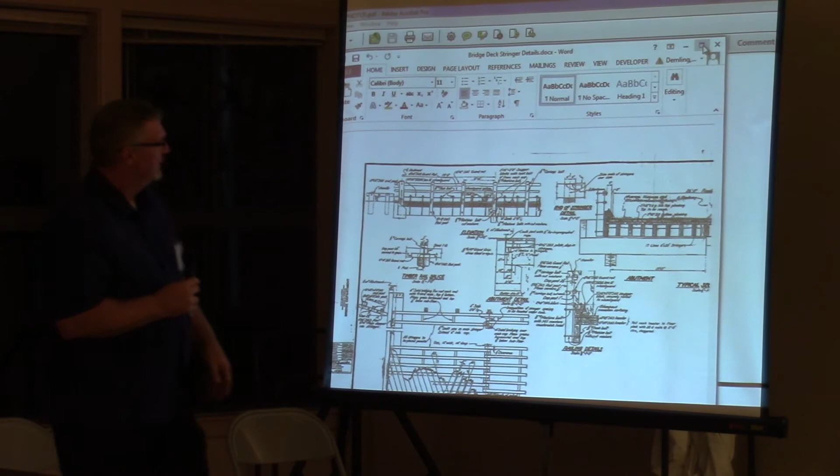What is it showing? Yeah, that's why I have the attachment, because some of these pictures, there's not a lot of reference. Okay, so this is a cross section of the bridge. This is the bridge rails. That's the roadway. We're looking up underneath like this.

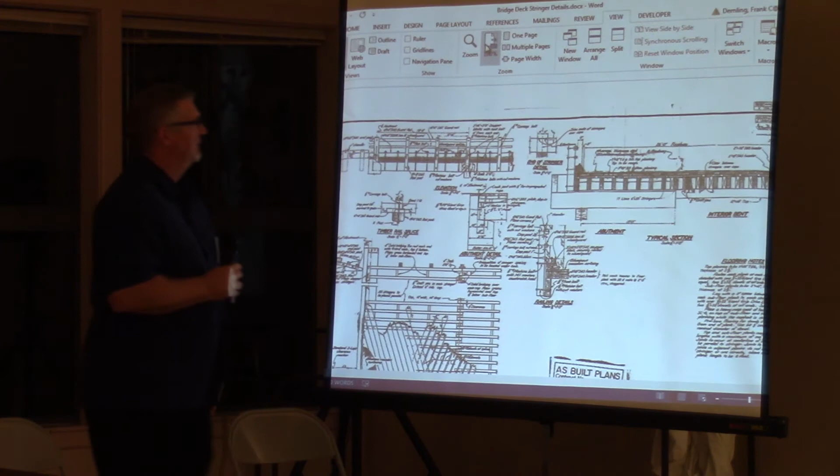You can close that out. Sorry, Frank. Okay, same. Okay, sorry. I thought I was going to have access to myself.

So basically what we're showing here is that there's the initiation of decay. So we have some white fungus growing on this. Let me say right now that anything that I show you, you should not be alarmed, because we close bridges that are not safe. You might see something that at first might go, what the? But it's not horrible. We're just documenting unemotionally the condition of the bridge.

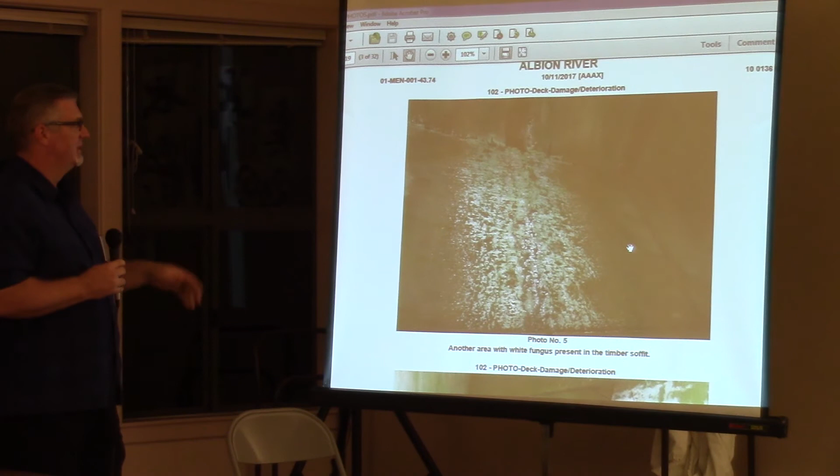So white fungus, normal on the underside of timber, because the water leaks through the AC, the asphalt, and then starts to grow this white fungus. Initiation of decay. Can that be scraped off or washed off? I'm not sure. If you get to it quickly enough, you might be able to put some kind of a herbicide.

I can speak to that. Sorry about that. Is it on? Okay, sorry. The cleaning of that, yeah, sure, you can get that off there. It's almost certain to come back. A mold or a stain is inherent. It lives in the element. And right now, molds and stains are not classified as a deleterious effect. It's not like a fungus that gets in there. So determining what species it is and its effects on the structure is something that we're looking at.

What Abby is making the point of is that we have photographic documentation up close. When we say we have this condition, it's backed up by a picture. That's in the record, on top of the engineer who signed and stamped the report saying, I have this condition. These documents are not intended necessarily for open public viewing, but they're certainly suitable for it. We use these documents internally.

If the county's engineer comes to us and says, hey, I think I got a problem with that bridge, we say, well, prove it. What problem do you have? And he brings us this data. So in any case, get back in.

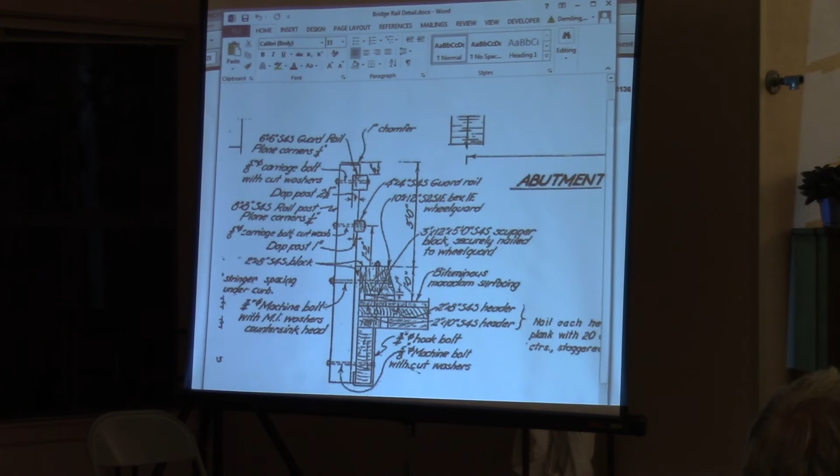If you stop at photo 9 for a moment, if you would please. Yeah, that's where I'd like my attachment to. So the question is, how does it happen that a deck drain, which is an integral part of the bridge structure, is allowed to clog or in some manner not function so that the timber adjacent to that drain rots? In an ideal world, the deck drains would be cleared, correct? But as all of us know from the gutters around our houses, that's a primary function of maintenance of any structure. What's your point? The point is, to the extent that the algorithm shows deck decay, how much of that is actually a function of that part of the bridge not being regularly and completely maintained? And do we need to boost the maintenance budget to get that done?

Oh, I would be all for a boost to the maintenance budget, having, you know, worked for maintenance, but yeah, the bridge crews are taxed heavily. And they do the best that they can with the inventory that they have to maintain. Sometimes, yes, deck drains get clogged, and that's just life. You can't fight entropy. So, but yeah, you are correct. And what you're seeing there, these pictures we're looking this way. You caught that, so you can close this out. I'm just trying to give people a reference on this.

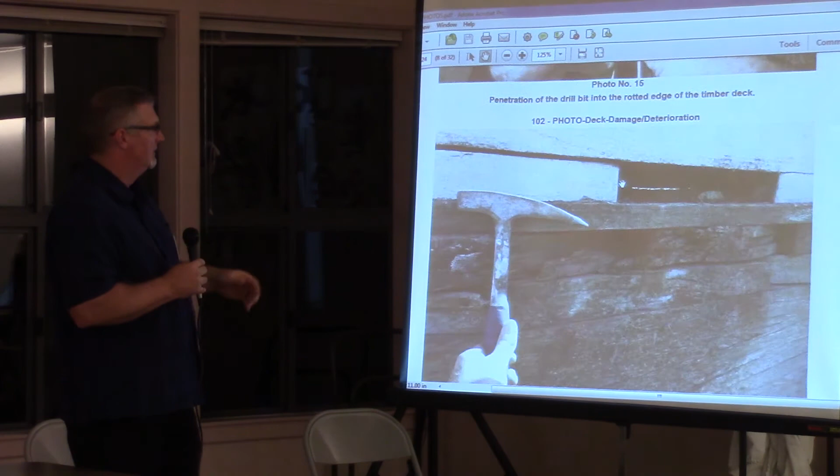So you can see how the timber, where it's exposed to the wind, the moisture, the sun, and if moisture is trapped in there, it's rotting, it's getting soft. But again, it's confined to the edges of the deck where the traffic is not on. We still consider this a fair deck. We're not saying that we need to put restrictions on this deck, okay? We're just documenting the condition. At that one point, he was documenting how much the drill went into the edge of the deck. More timber deck, okay.

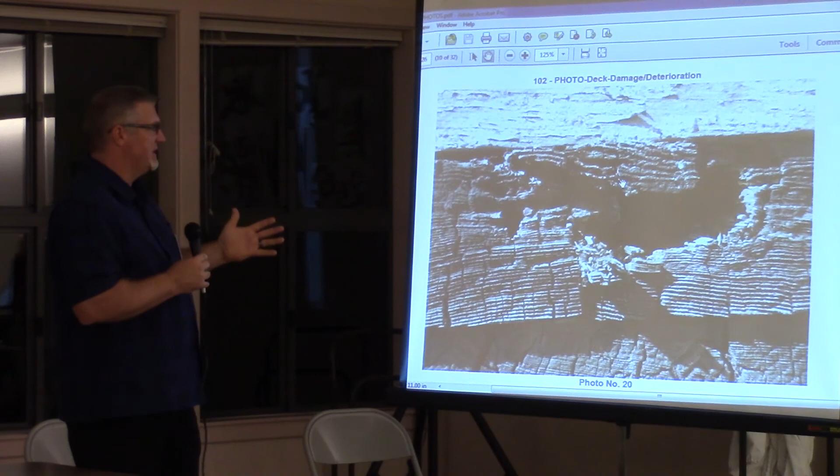So you can see we got some soft deck on the edges and also some fungus initiating decay on the bottom of the deck. Okay, here's some bolts. Again, we're trying to document some of them, you can't really see these, but there's some pretty rusted bolts there. These are in the diagonals of the timber truss. Do you have a measurement as to how deep the rust has progressed? Well, there you have it. At this point, it's like we need to replace it.

Yeah. The simple fact, sir, is that when we see corrosion to the point where it advances like that, our assumption is that it's throughout and we're not going to make that measurement. We're going to remove and replace. All of them? The ones that look like that, yeah. But what's the threshold? 10%, 20%? Failure is at that point?

So there is a zinc coating on the bolts. As long as the zinc coating is intact, and we still are seeing corrosion protection there, the bolts are performing their function. If I see any kind of measurable section loss, I'm making a recommendation to replace it. Any measurement? Any measurable section loss. Again, we assess to the as-built condition. We strive to keep the bridge in the as-built condition.

So the 816 bolts that were replaced were the total out of the 4,800? Yes, that's correct, but that was done in this last contract. Right. And prior to that, it was District 1 Bridge Maintenance that was doing the work to replace bolts, but that work could no longer be done by the district because it became just too difficult. It was just too much for them to handle with all the other work they had. So we had to let a contract to get a contractor out here to do that work. And they not only did that, but they also repaired some rotted timbers and some spalling on the concrete towers.

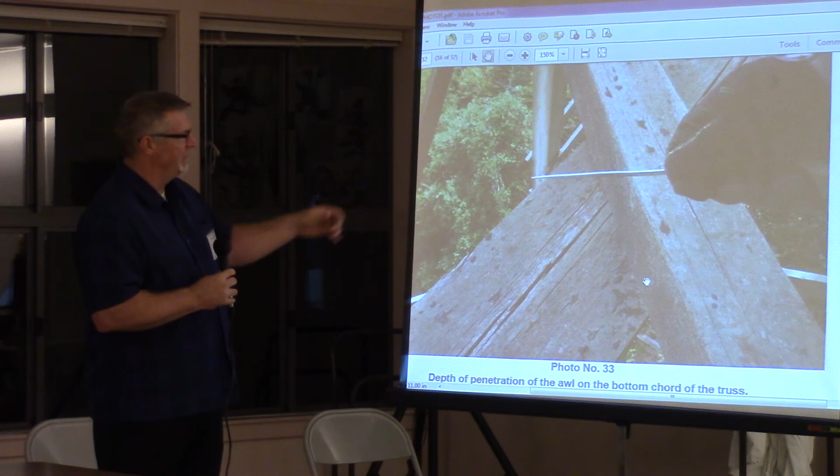There were a couple pictures, I think one back. Well, in general, we're documenting the checks in the timbers. This came up. The gentleman brought up that the checks are going to introduce a way for the moisture to get into these timber members. We're seeing that. It's pretty much throughout the main timber members, the checks. You can see these in the vertical members. And that was just an overall view. They're pretty much in every timber member. We're just showing the depth of how far the awl is going into those checks.

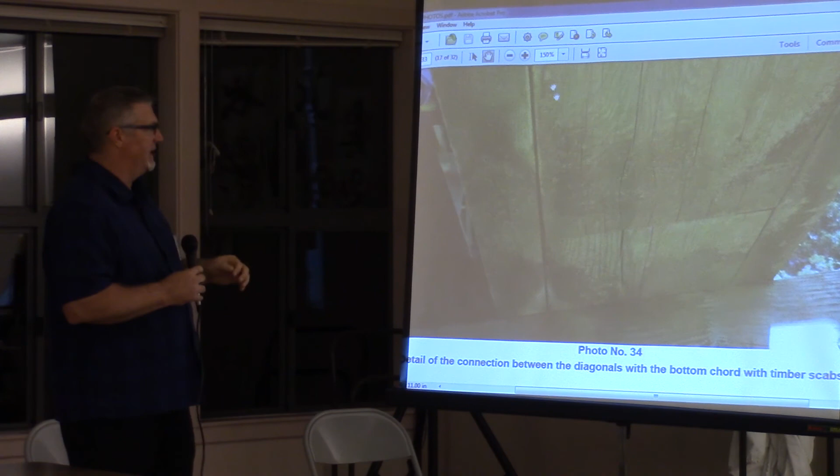This is a detail from the bottom of one of the truss connections. And these connections are split on what are called scabs, and they will need to be replaced. But again, we're not talking about a safety issue, we're talking about a maintenance issue. Was that the as-built way it was done? No, that's why I'm saying they will have to be replaced. And like I said, the draft report is in progress. We don't have a complete report to show you yet.

And we're looking at decay checks on the timber bent caps. See some more checks in the timber bent caps. It's going to be more access for water intrusion and decay. That's a pretty darn important element there, right? Are you able to determine whether that happened last year or in 1947, those checks? That's a good question. I'd have to look into that. We'd have to examine the graded record. You find that when graded timber comes out of the mills today, a certain amount of checking is accepted, particularly in wide face timber elements. What it was graded at in '43 was probably much different, much more stringent.

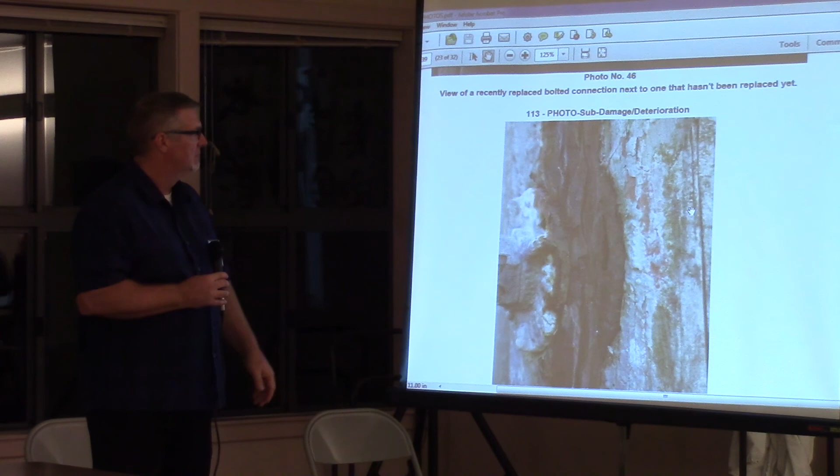Is this all Douglas fir? The towers are Doug fir. The timber trusses and the timber decking are clear heart redwood. And is clear heart particularly prone to rot? Well, clear heart redwood of that era, I think those were old growth trees. The rings per inch, the grain, is pretty darn dense. We can't get those. And you're right, they're resistant. And so is heart old growth Doug fir. But I'll tell you that while it's resistant, that means it takes longer than, say, just a stick on the ground. It's still going to happen, right?

Question, are you sure on the redwood? It was a restricted item in World War II. I saw some correspondence, and I'm not going to try to make anything up here, but I think there had to be a special plea to go after that, because I think at first it was denied. The War Department said no. And then we came back at them and said, you gotta have it. And they were able to get some shipments. But I've got to look in the record for that. That's an anecdote. I'm not going to state that as fact, right?

Frank, could you scroll back? I think there's some more attachments on one of those superstructure slides. Yeah. There's a couple pictures, no, it's not that one. It's those down below. These.

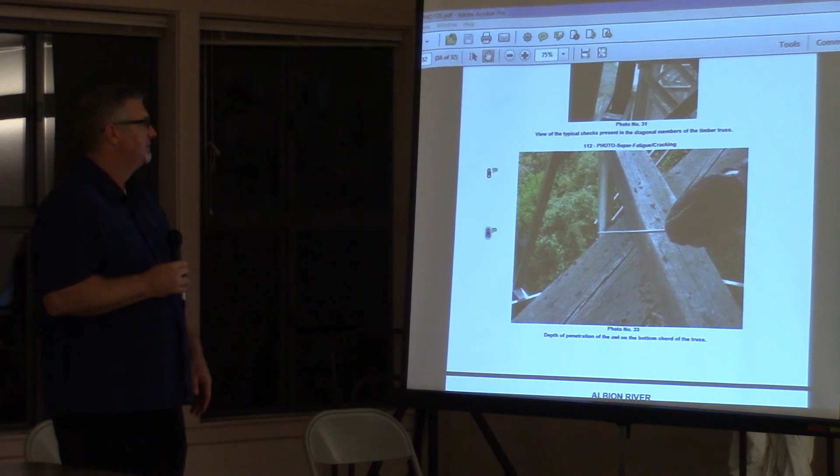I think the other one is a little more advanced. You want to zoom out on that, so you can see what's happening with it. We got the checks, water's getting in there, and it's creating a wet-dry condition.

Okay, we can go back down to the shear ring. We found evidence of one shear ring that we could actually see, and it was due to the way it was constructed, the steel strap. It was a timber to steel strap shear ring. It's a little further down here. There, it's up there. So this is the steel strap. This is near the base of one of the towers. That's the timber, and then this is the shear ring. And probably because it's exposed, it's got some corrosion on there.

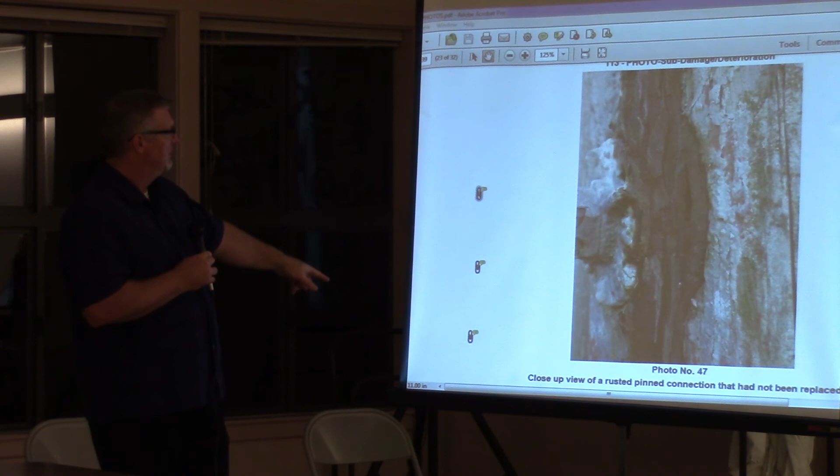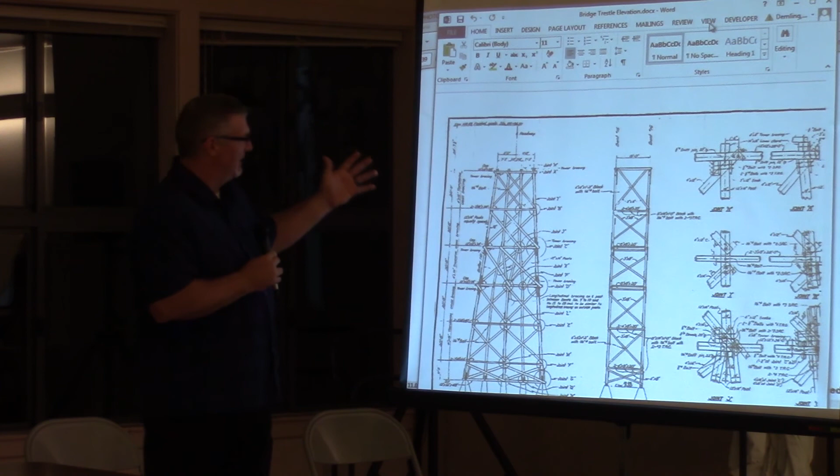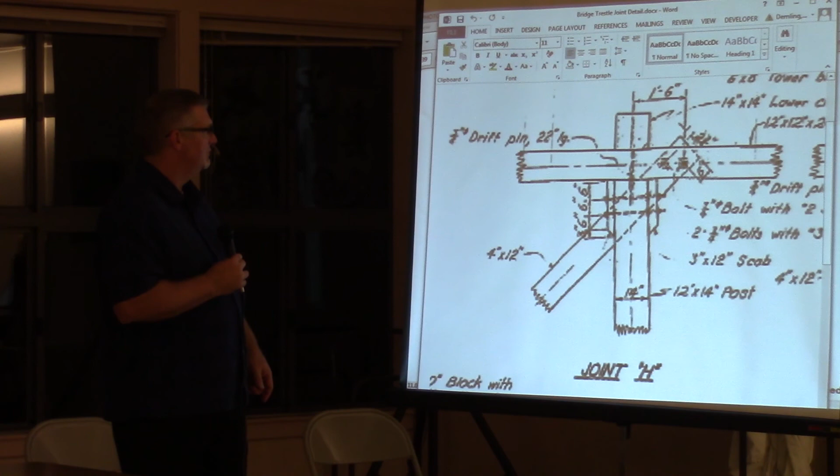And if you go over to those attachments and you hit that first one, I wasn't sure if everybody knew what the shear rings were all about, so this is the big picture on the trestle. It calls for all these shear rings at the different locations and which ones they want. And then you can close that out. I got a detail right there. I think it's a little closer. So I think it's over that way. It doesn't really matter.

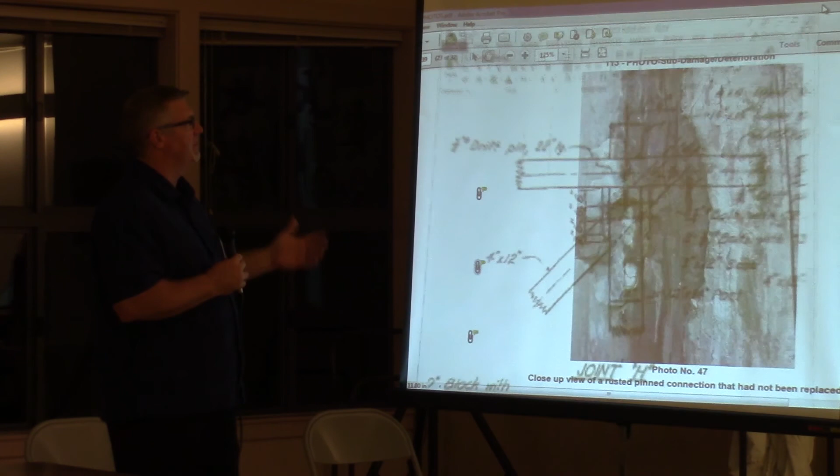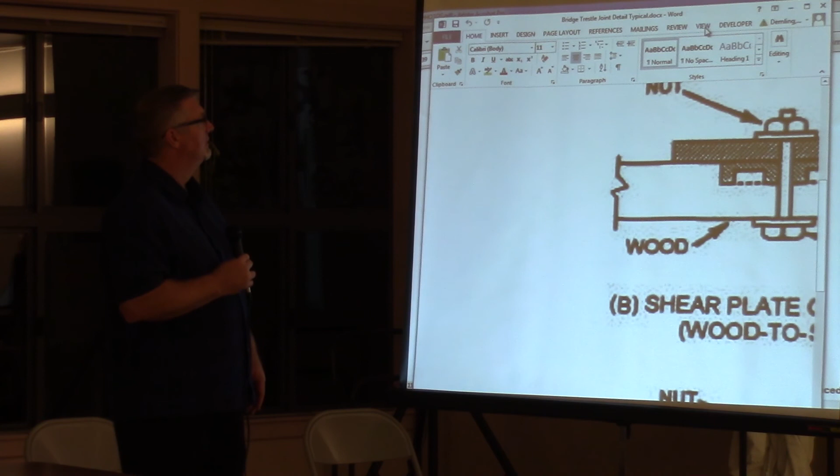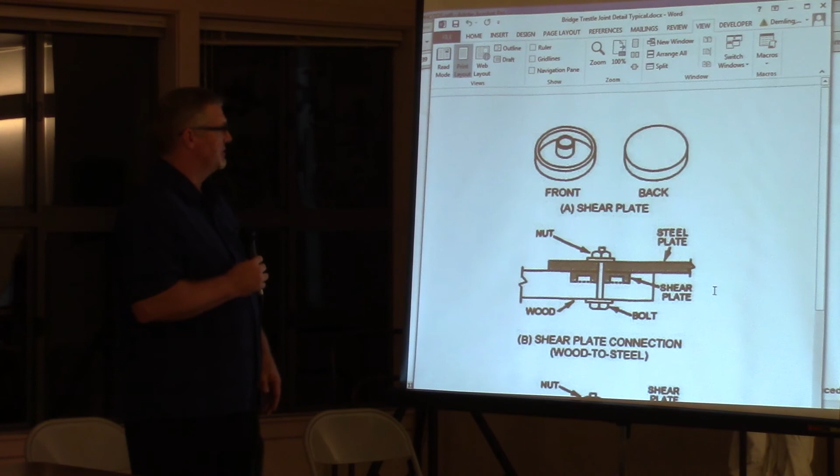Just for people who are maybe not aware, whenever you have timber and timber with bolts going through them, you have these shear rings. The next attachment I think is a little clearer. These are the as-builts, but the next one I just found a picture of one. It shows more clearly what it does. Let me zoom out a little bit on that. Okay, so the picture of the rusted shear ring, it was a timber steel, and there's the shear ring there. And if you scroll down to there, you can see why we can't see the shear rings. These are inside the two timber pieces.

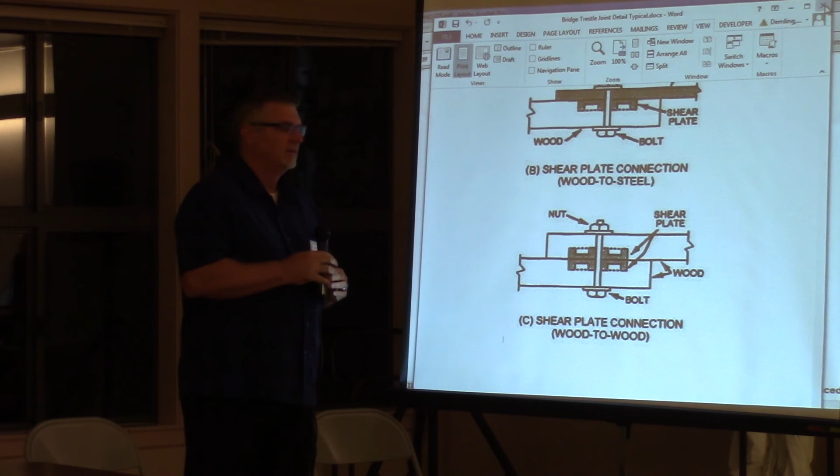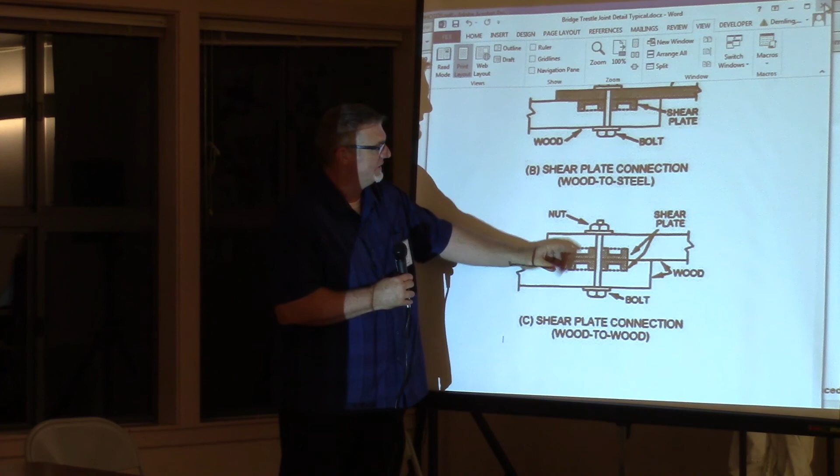Can you explain that a little more? We've heard that a lot. It makes a bigger area to hold. So when they're assembling these timbers, they have a little jig and they cut this out to the size of the shear ring, then they put the timbers together and bolt it together. And this thing is designed to resist this kind of separating, like shear.

So I could add a little bit to that. I believe you were on point there. Timber crushes, right? Timber's strength perpendicular to the grain is not terrific. So a bolted connection like that with steel against timber perpendicular to the grain is going to crush if the stress is high, and the stress is force over area. So you're quite right. These shear rings are put in there to make a larger area and distribute the forces over a larger amount of the timber so that the design demand is met with a reliable capacity. So that's what they're there for.

And as was pointed out by Mike earlier, when these things get stressed up, that's when we're going to need them. I rushed through them in the interest of time, but in all the pictures we had before of the bolted connections, we don't see any distress. We don't see any shifting or anything like that. All we see is the rusted bolts at this point.

Time to wrap it up, Andy. We're at 8:35. So 8:30. I got the music. They booed me off the stage.

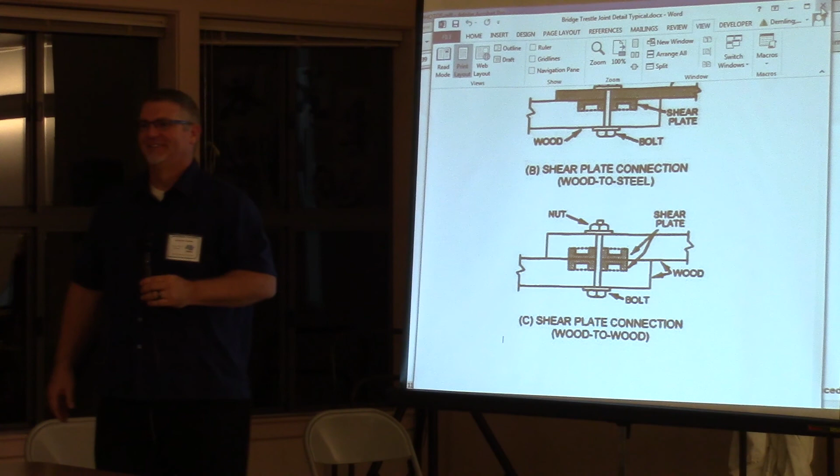Can you tell me the dimensions on those shear rings, how thick the material is? It looks like they're shaped kind of like a cup, or are they just real thick? Go to the top of this section right here. But just remember, this is just one I got off the internet, for illustrative purposes only. That's the shear ring right there? It's similar, but it's not from the as-built. Okay. My mistake. The specification on the as-built called for a specified part or piece that was available in the day, and so we found a pretty good facsimile of that here.